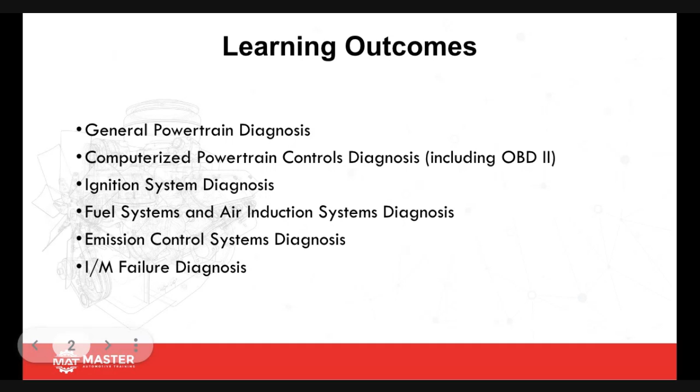But I do recommend that if you guys learn the 5-gas, purchase a used 5-gas analyzer. If you're like us here in California, we're required to actually have a 5-gas if you're a smog check station, and we use that more than just for emission inspection. We actually use it for diagnosing purposes also. That's what we're going to be covering with you in that section.

Anytime we're going to start a diag, I always recommend to start with an interview of the actual customer. Now, I get it, some of you guys might have a service advisor that is your liaison between the customer and you. However, your customer needs to be properly interviewed. Now, if you're here in the class, you're going to get access to this PDF worksheet that we've put together.

We've also had some input from a couple of great automotive instructors, Jim Morton for one, and we used some of his format, then incorporated some stuff of ours, and this is the worksheet that we came out with. So when a vehicle gets dropped off to us for a diagnosis or an evaluation, we make sure that this worksheet gets filled out. The more information we have pertaining to when the problem occurs, the easier it's going to be for us to properly diagnose it. So any diagnostic and or evaluation begins with a thorough customer interview.

The everyday driver needs to be the one interviewed before commencing any diagnostics. So if it's grandma's car, but grandson brings it, it's not a good idea to use grandson's explanation. If grandma gave him 10 minutes worth of information of how the problem occurs, grandson's just going to say it makes a noise. So we want to make sure that we interview grandma so she can give us every single detail of how we can duplicate that problem. And this way it's going to give us a better chance to properly diagnose it and repair it on the first try.

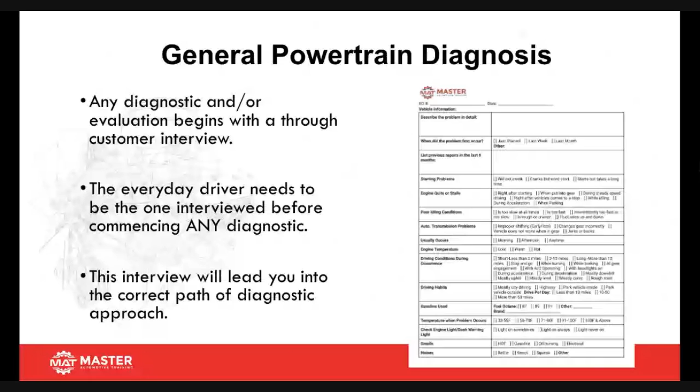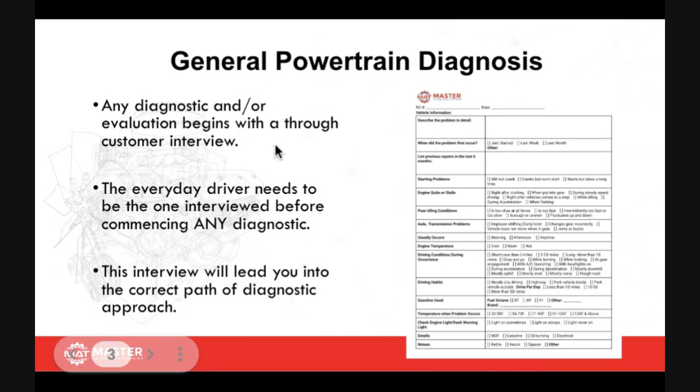One thing that we do is go on a road test, because if I go on a road test with the customer, it gives me a chance to see, listen, and duplicate the concern they're having with their car much easier than if I was doing it on my own. So keep that in mind if you guys are out in the shop. Make sure you do a proper interview, and then try to go out on a road test with your customer to make sure you're actually focusing on the right concern.

Another key thing is: is this a concern or a complaint? If it's a concern, that's something that interests you because it's important or affects you—that's the definition of concern. A check engine light on with a rough idle is a concern for a particular car. A complaint is an objection or something that is unfair, unacceptable, or otherwise not up to normal standard, like a customer complaining about noise from their new mud terrain tires. We need to be able to differentiate the two.

If I have a customer concern, it means it's an issue I'm going to have to pull tooling out for. If it's a complaint, usually it means you're going to have to look in the owner's manual or find some source of information to help them understand that it's something new with their car.

I don't know if you've had a customer that's been good for years—they finally decide to get rid of their clunker. The new car they pick up has different buttons and features the old one didn't. So they bring it in saying, 'my car is doing this and that.' When you go check it, it's like, 'oh, your car used to have a 6 CD changer, now you have Bluetooth, that's why you can't use that adapter on your car.' That would be a complaint, because you have to explain to the customer that as technology advances, that's why they're having a different issue they weren't used to having with their older clunker.

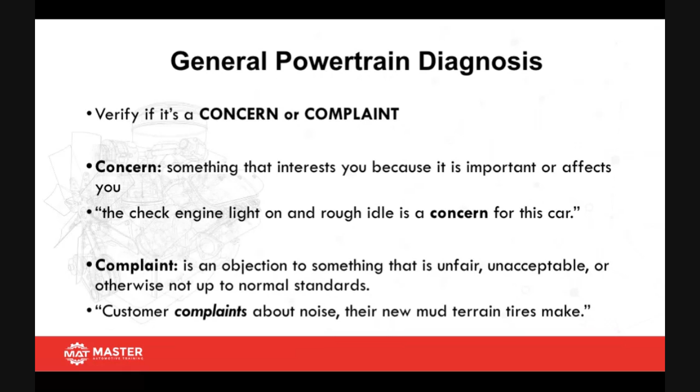Here's a good example of a concern: vehicle lacks power going up a steep hill, with a check engine light on showing codes 171 and 174. Both fuel trims are showing plus 35% on long-term and short-term fuel trim, meaning we have a lot of fuel adaptive on both banks. This is a concern since you have a MIL and a drivability issue that can be felt by the driver—this would be labeled as a concern.

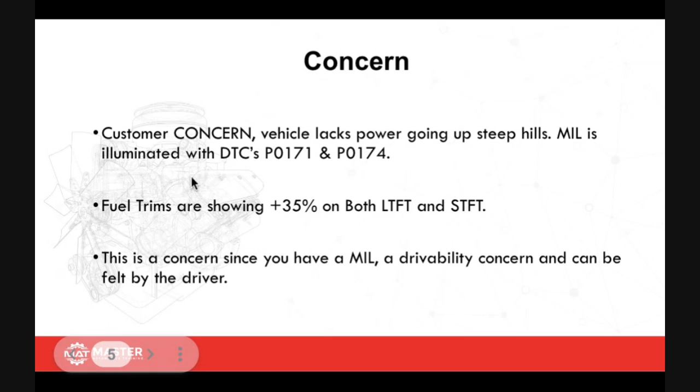So if a vehicle comes in and meets this criteria, you're going to call that a concern—that would be your customer's concern.

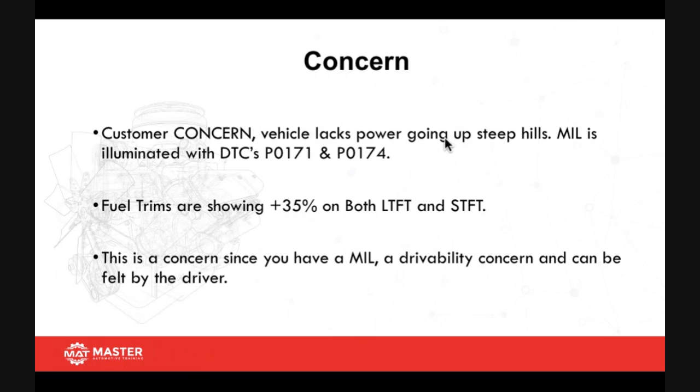Now a customer complaint—this is one I actually got to work on. A Ford F-250 came in, I think a 2007 or '08, and the customer's complaint was they weren't able to control the radio below a specific speed. The previous shop that worked on it tried to replace the radio, but the customer said that doesn't make any sense. So they brought it to us for a second opinion. This was relatively new and weird to me since I'd never run into this situation, so I did what every good technician would do: I pulled out the owner's manual, dug through the glove box, found it, and started reading.

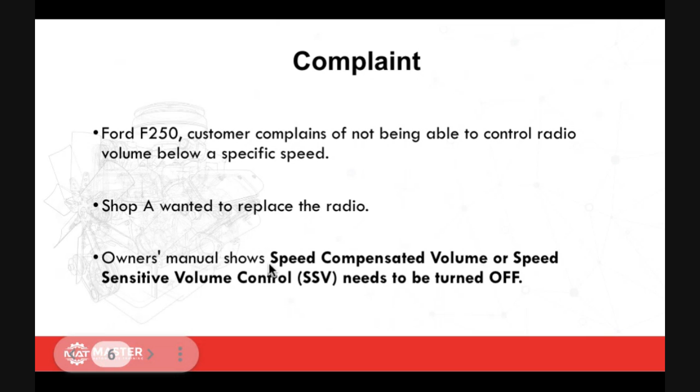What I found was this Ford product had a speed compensated volume—some call it speed sensitive volume control, or SSV—and it had been turned on. So I went through the menu functions on the radio and turned it off, and voila, the problem was gone. I documented all of that, and when the customer came in, I showed them exactly what happened and told them if it happens again, go through the menu section and turn it off.

Now most of you were probably thinking, why didn't you just sell them a radio? I could have, but if I'd sold them a radio and then someone accidentally did this again while the vehicle was still under warranty, when they came back to the shop, what would they expect? Another radio. And if you pull the radio out and try to get the manufacturer to warranty it, they're going to say there's nothing wrong with it.

And then what are you going to do then? Let them know that, so I messed up the first time and sold you this super expensive head unit, when in fact, all you really need to do was do a button sequence and turn it off. This is why it's important for us to be able to differentiate whether it's a complaint or a concern, and then how we're going to be able to approach it to be able to repair it.

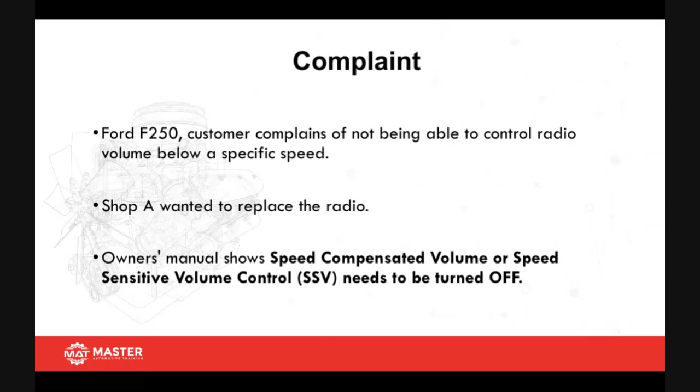Anytime we're going to start a diag, always make sure you guys start with the visual inspection. I can't stress enough how many times we've gotten cars into the shop where another shop was recommending a bunch of repairs, when actually all the car needed was just some visual repairs, some stuff that we saw visually, and it didn't need any in-depth or any crazy type of diag.

So when you're doing a visual inspection, make sure that you guys do stuff like check your belts. If the timing belt's accessible or has an access hole, kind of take a look at it. Serpentine belts, take a look at that. Radiator hoses, vacuum hoses, crankshaft pulley, alternator pulley. Sensors, make sure that they don't look like they're oil contaminated or broken, zip tied together, taped together. All covers are there, and if you possibly can, check the functionality of certain components. You can most of the time do that with a scan tool on the bidirectional side.

Now, something that's also very important as automotive technicians, when a vehicle comes into the shop, not only are you guys performing a diag, but you're also doing a visual inspection. This visual inspection helps you and the shop be able to recommend other services that might be needed by that vehicle. So that way the customer is aware of it, and then they can get that done at a later time or at that time that the vehicle is in.

Particularly when it comes to hoses, hoses actually deteriorate. And if you don't fix them or replace them prior to their deterioration, then that's when you can get a blown radiator hose that causes the vehicle to overheat and then turns out to be an entire engine overhaul. So make sure that you guys are also working with your shop foreman or your shop owner to create some sort of recommended intervals for these types of components. So this way you guys can recommend these to your customer when the vehicles are coming in for service.

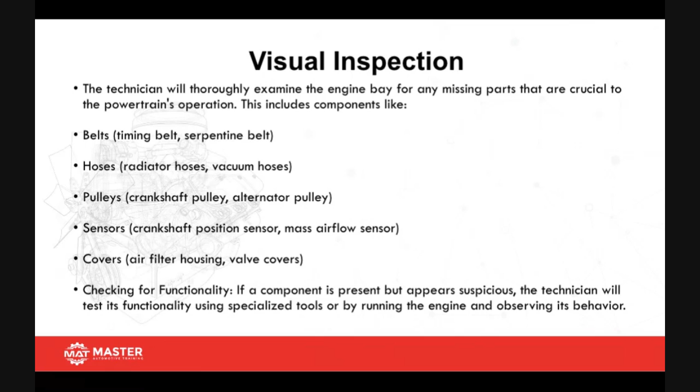Part of your visual inspection, make sure you're looking for modified components. Did they add anything aftermarket that wasn't there that came from the factory? Supercharger, turbocharger, did they add some sort of lighting kit? Anything of that sort, pay attention to it. Has this vehicle been welded or modified? Right? That's a big one. If the vehicle was in an accident and they re-welded, let's call it the front bulkhead, that can cause a ground delivery problem.

So that could lead to other faults. Are there any altered brackets or mounting points? Was anything moved, repositioned? Are there any non-standard materials used? Did they actually paint over a ground? Right? So we want to make sure that you guys can do any type of those visual inspections. So this way you can see right off the bat, do I spot anything here that might be suspicious that might be causing this issue?

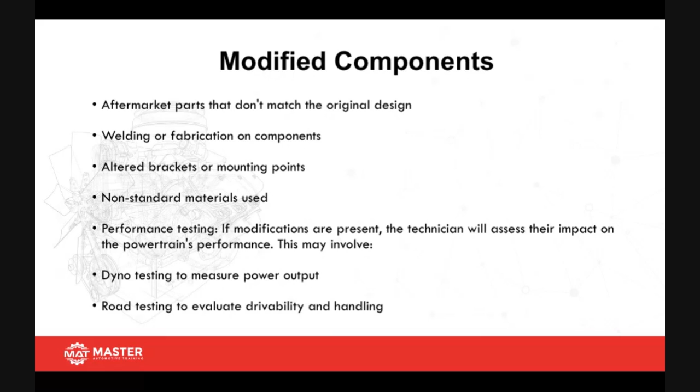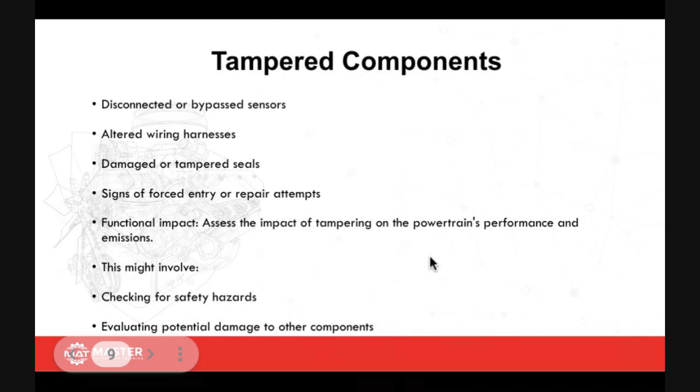Tampered components would be anything that's disconnected or bypassed, altered wiring harnesses, damaged or tampered seals, signs of any forced entry or attempted repairs, functional impact, like was the vehicle hit in any way, shape, or form? This one's important. Like when you come to some of the Euros, they keep the modules in a plastic box. And if the front windshield was replaced and not sealed properly, then you can get a lot of water filling up in that plastic box.

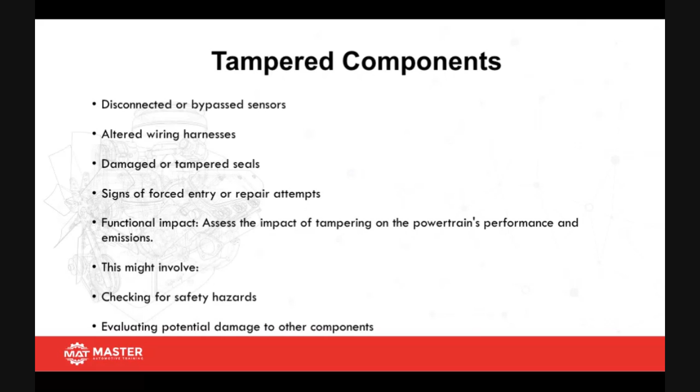So then what's sitting in that box? About 4 to 6 modules. And then once they get filled with water, what's going to happen is going to fry all of them. So this is why it's important that you guys do a visual inspection so you can determine if any of that's at play before you actually recommend any type of repair.

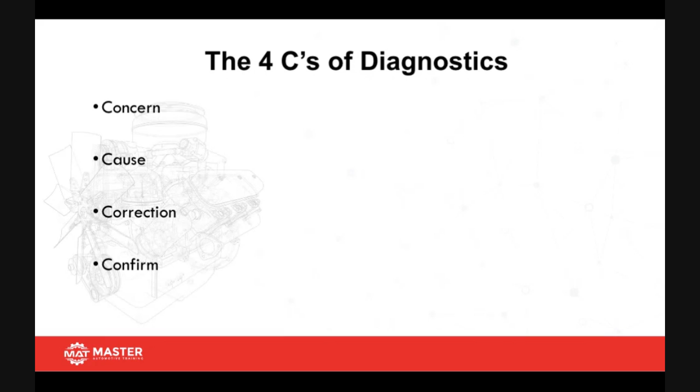When it comes time to diagnose a car, you always want to start with the 4 C's. What are your 4 C's? Concern, cause, correction, and the one that most technicians do not do, confirm. So let's go ahead and jump into them real quick so we can take a look see here.

So a concern. Vehicle comes in with the MIL light on. You pull the DTCs and you find a P0300 and a 302. You feel a rough idle and it started about a week ago. So now you have an idea of the concern that your customer is actually worried about. Now your job is to come up with a game plan on how you're going to approach this.

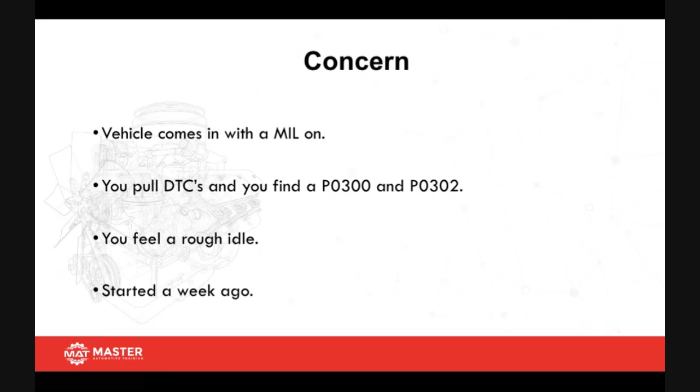Typically, one thing we do with any type of diag, after finding the concern, is run some sort of general test. Especially since this vehicle has a misfire, I would have started with a relative compression test, using an oscilloscope on the battery, either with an amp probe or connected directly to the battery, to verify all cylinders are contributing the right amount of compression. This way I can rule out a mechanical problem right off the bat and move into ignition or fuel. So we ran an RC test to rule out a mechanical fault, and that one passed.

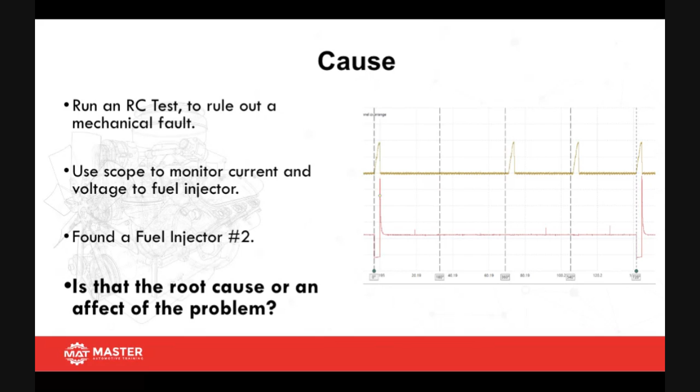Now, is that the root cause or an effect of the problem? The reason I ask is that on some newer vehicles, the engine computer will turn the injector off if it detects a misfire. In these cases, you want to save your freeze frame, then clear the codes and see if that injector waveform comes back. If it doesn't, you've confirmed it's a bad injector. Now your job is to figure out: is it a shorted or open injector, a power feed problem, or a control side problem? That's relatively easy to do.

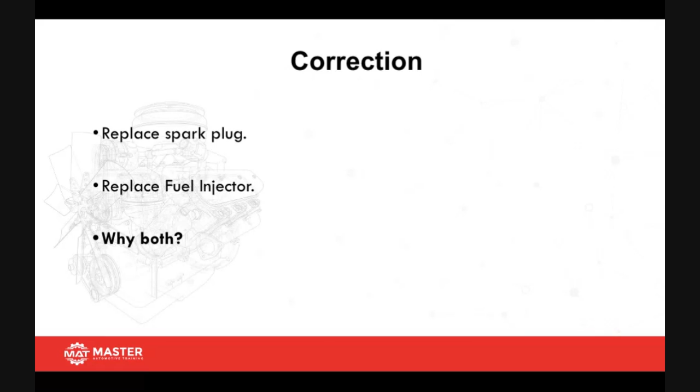From there, the correction would be to replace the spark plug and the fuel injector. Why both? Because if you had a problem with the fuel injector, that could have caused damage to the spark plug itself, if it was overheating or anything of that sort. It's best to replace those as a pair, so once the vehicle takes off, you're not running the risk of it coming back for something similar, with the customer saying you guys didn't fix it properly, the problem's back.

Then lastly, you want to confirm your repair. This is the step that most technicians skip. What they end up doing is the repair, and then their test drive is so minimal it's just pulling the car out of the bay and parking it in the stall.

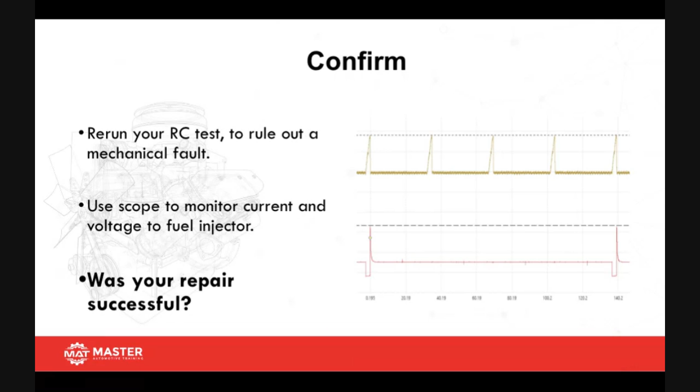So one of the things you guys want to get comfortable with before working on the car is service information. Anytime you're working on a particular car, make sure you get all your ducks in a row. Do your research, pull service information, pull wiring diagrams, and set up a plan before you start testing the car. Once we pull a car in, we're going to pull the codes, and once we have all the codes set, we start working on our plan. We don't want to waste time going back and forth or switching from one test to another without knowing if that's a good idea or a good process.

So service information is going to be super important. Like we said, we had a misfire, so we can look up misfire counters here, and this information will let you know how the system works.

So based off of the information here, the system's telling us, or the manufacturer's telling us, that the PCM uses a crankshaft sensor for misfire detection and to control spark and fuel. As the crankshaft rotates, the reluctor wheel teeth interrupt the magnetic field produced by a magnet within the sensor, producing a signal which the PCM reads.

That's positive information. Now, this is one thing that a lot of technicians suffer on because they don't go and read the service info. One thing that I'm a big believer in is if you know how it works, you're going to be able to fix it. So this is why we always want to turn to service information first, so we get a good understanding of how the system works.

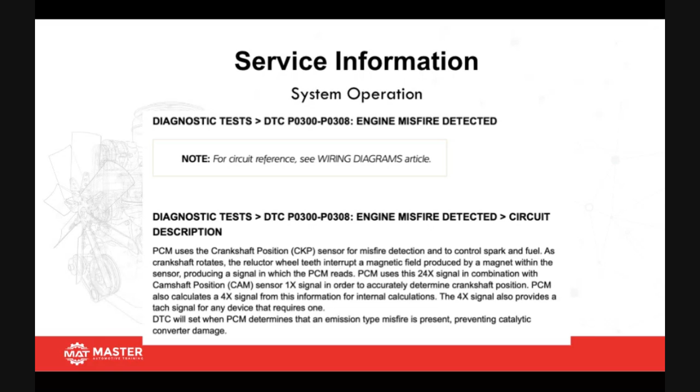So here's the whole diagnostic procedure for a misfire on a GM product. Now, one thing that I can tell you guys is at the beginning, you might be following each individual step. One of the things that happens with all these steps is a lot of times they're redundant, or the steps are going to say replace with a known good component. Unfortunately, we don't have that luxury.

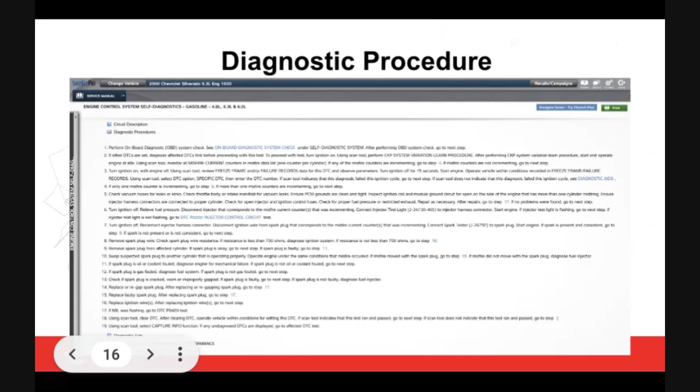Your best option is to read over the whole diagnostic procedure and then determine what are some tests you can run and what equipment would you use to run those tests. Run them and then verify with your diagnostic procedure which way you're going to be headed with the remaining part of that diag. Always make sure that you guys are looking at your diagnostic aids. Most service information is going to give you a little diag aid, as we call it.

So this one: if more than one cylinder showed a history code for misfire, look for something in common between the cylinders, such as a shared coil. Also check for vacuum leaks that affect this cylinder. If the fault cannot be duplicated, mist the secondary ignition system with water, and then operate the vehicle under conditions to set the DTC. So these diagnostic aids are very important.

They're telling you this because a lot of technicians around the country have run into similar issues, and this is what the manufacturers' tech help is recommending you do. So again, this is why we look at all this information before we start testing the car, to make sure that we have every angle covered when we begin to run our tests.

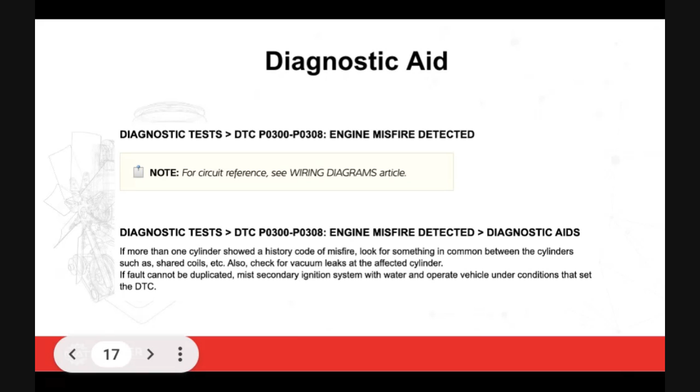The other one that I see most technicians not do is technical service bulletins, or TSBs. What ends up happening is technicians get so into a hurry and a frenzy to get it in and out that they don't bother to look at TSBs until the very end. A technical service bulletin lets you know of common issues that manufacturers have seen with particular cars and particular faults.

So for this one, information on rough idle, crank no start, extended crank, or misfire due to excessive carbon on the top of the valves or sticking valves. And then it gives you a list of all the misfire codes you might be attributing with this fault. Now, why would it be a good idea to do this?

What happens if this vehicle was in your service bay and it has a misfire and you've tested everything and everything tests out fine? Well, if you didn't bother to look at the TSBs, what are you probably going to end up selling them? Maybe spark plugs and coils, right? So this is why we want to make sure we look at the TSBs before, so we're 100% sure whether this TSB might be related to this particular fault on this car.

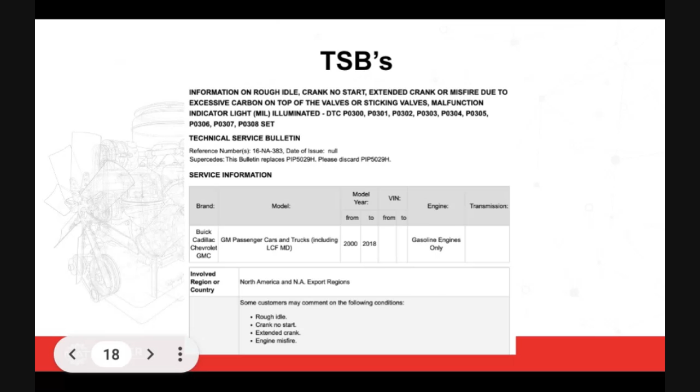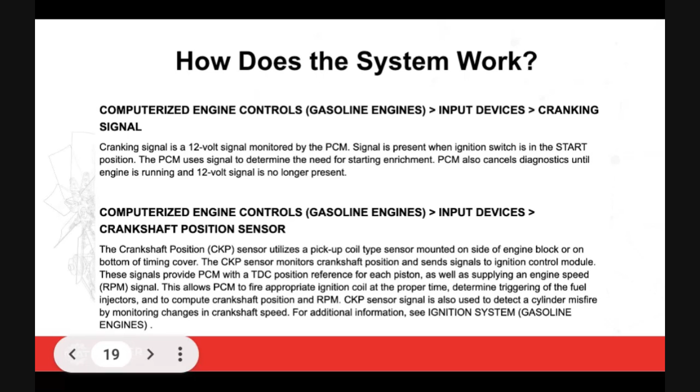The PCM also cancels diagnostics until the engine is running and the 12-volt signal is no longer present. So the PCM is going to be monitoring that signal to get the vehicle to start. That's super important. What if you get a car that comes in as a crank no start, but you weren't aware that the crank signal was what the PCM was looking at to know it needs to enrich it for startup? Okay, so this is why we always have to go to service information to know how this system works, so I can properly diagnose it.

And anytime you guys are going to be doing a diagnostic, either for a MIL light, a drivability concern, an emission failure, always remember these three funnels. It's an air fuel, mechanical, or an ignition problem. If it's air fuel, that's going to be fuel trim, volumetric efficiency, or calculated load. If it's mechanical, that could probably be valves, rings, maybe crank, maybe timing. If it's ignition, is it primary, secondary, or the coil? So my job as a technician is to quickly get into one of these three funnels.

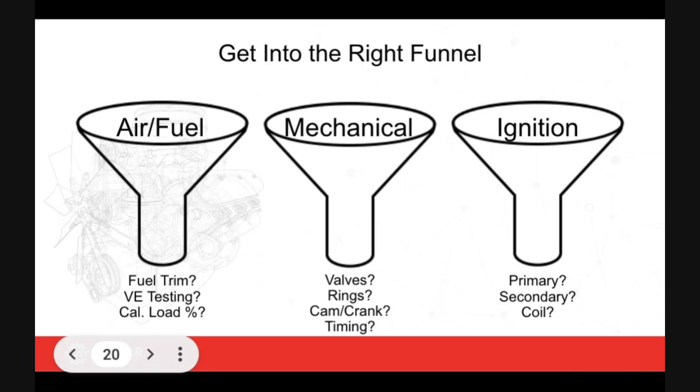Now, here's a good example. If a car comes in and has a drivability concern, lack of power, what happens if I add propane? Does the power come back? If the power does come back after I add propane, what could that be? That could be a fuel delivery problem. So now I'm going to fall into the air fuel funnel and I'm going to stay there. Now I'm going to start testing everything in relation to air fuel before I go into mechanical or ignition. This is the beautiful thing about understanding the funnels, right? We always want to do a general test first and then start going into the other tests to then determine exactly what is causing your customer's concern.

So this is what I was just talking about a few seconds ago: general testing versus pinpoint testing. Now, if a car comes in and you want to test for a misfire, relative compression test is a general test. This is going to let you know, do I need to go pinpoint compression or a leak down? If it's a breathing problem, do a volumetric efficiency test. Then your pinpoint test would be fuel pressure, fuel volume, exhaust restriction, or timing.

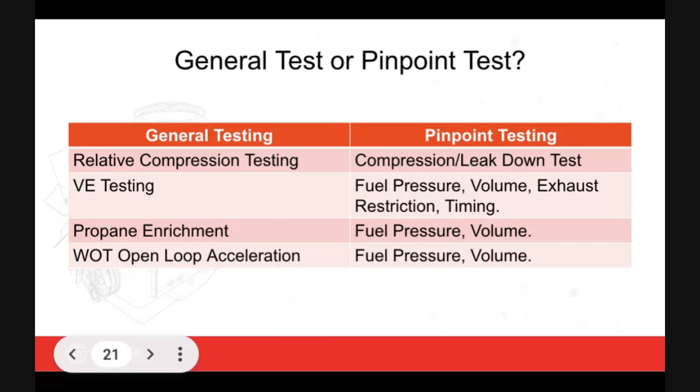Add propane. If that helps, then it's a fuel pressure or fuel volume problem. Wide open throttle, open loop acceleration. And if it goes into open loop and the problem goes away, then that means that it's a fuel pressure or fuel volume situation. So just for a quick reference, the 4 strokes of a 4-stroke engine are intake, compression, power, and exhaust.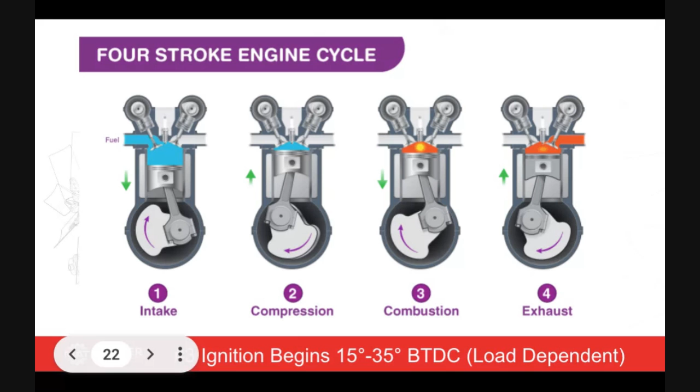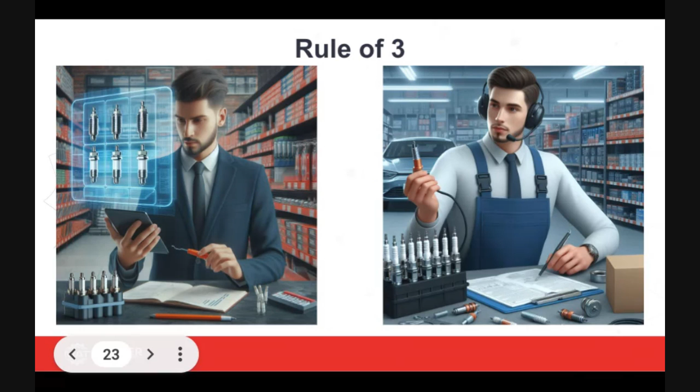So here in the shop, we have a thing called the rule of 3. And for some reason, it's always 3. A car will come in and say, hey, we already replaced three injectors on this particular cylinder and it doesn't go away. We replaced 3 coils. We replaced 3 modules. I don't know why it's always 3. So we came up with the rule of three. Please don't fall into this trap. This is for the guys that are not trained.

Here at the shop, we have a funny, we call it the rule of three. We have a rule of three that we make a big joke out of. But it's sad because it is a joke. However, this is the most common thing that shops and techs do out in the field. So typically, we'll get a car that comes in, and no matter what the problem might be, they've replaced three or more of that same component. We've had cars that come in, and there's a box of goodies, we call it. It's all the parts that have been thrown at it or replaced in the attempt of fixing the actual car.

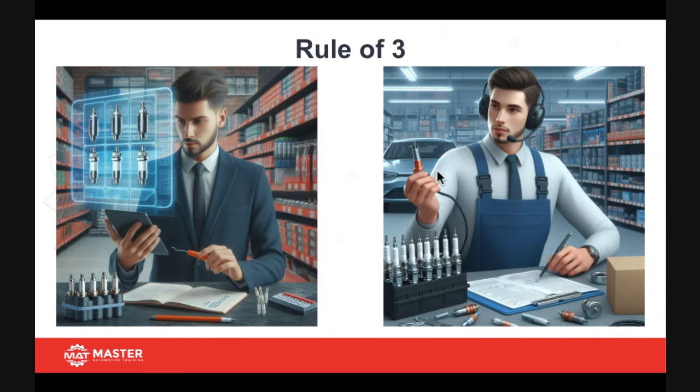We've seen cars with a box with three modules, three throttle position sensors, three throttle bodies, and stuff like that. And that's why we came up with what we call the rule of three. But with you guys being really good techs and attending training, you guys will not be part of the rule of three. So just if you guys hear it, it's a rolling joke that we have here in the shop, and that's what it means.

So one of the things that we can always do as a tech when the vehicle comes in would be to do a compression check. What the compression check is doing is testing the engine's ability to seal. And it's always a good idea to make sure that you do this with the engine hot. This way we can make sure that everything has expanded and seated properly. And then now we can run the test. What you're going to do is you're going to disable fuel. You're going to remove the spark plugs and disable spark. The reason why you want to disable fuel is you don't want to wash the cylinders. And then you want to disable spark because you don't want to burn out the ignition coils.

You want to introduce your compression tester into each individual cylinder, hold the throttle pedal wide open, and then crank the engine several times, usually about 5 to 10 revolutions, until you get a steady, no more bouncing or increasing compression needle. Make sure that your compression hose that goes into the cylinder has a Schrader valve in it. Do not remove it. You only remove that if you're using the testing hose for a pressure transducer.

Then you want to repeat on all cylinders and then document it. So we're going to provide you guys with a worksheet where you can actually write all this stuff down, because this is pertinent to your diagnostic and also your technician notes when you are providing those to the customer or your service advisor.

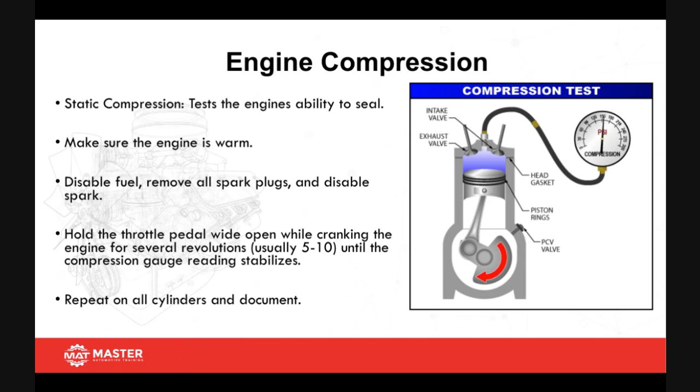After you do a compression check, the next step should be a running compression. A running compression test is going to test the engine's ability for volumetric efficiency. How well can that engine take in air? That's what we're measuring with a running compression test. Again, you want to make sure that the engine is warm.

You're only going to remove the spark plug for the cylinder that you're going to be testing, and you want to disable fuel for that particular cylinder. Also, make sure you ground out the coil or the spark plug wire for that cylinder as well. Start the car up, and then what you want to do is burp it right away. And then once the compression reading comes up, you should be at about 50% of that of static. So perfect example, if you have 160, you should be at 80 running, right?

So we always want to make sure that not only do we do the static test, but we need to follow that up with the running test. And this is where I see a lot of technicians drop the ball. They completely miss out on doing the running compression check. All they do is the static and then move on. We need to make sure that we also do the running compression check.

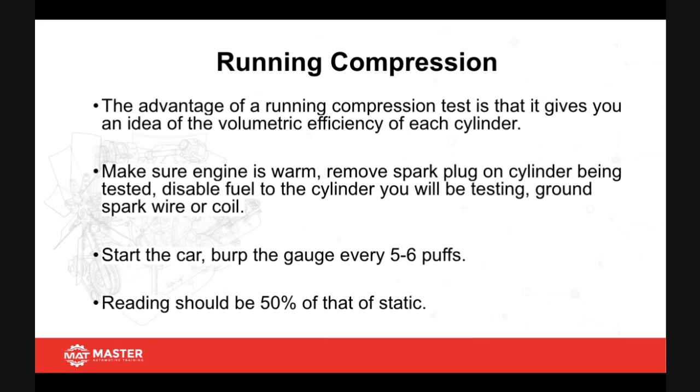So a wet compression check. What if we run down and we do the test and then we notice that one cylinder is less than the other? Well, one of the things we could do is we can add a couple of drops of oil inside the cylinder. What we're doing here is adding the small amount of oil, usually about a teaspoon or so.

If the compression comes back up within about 10 to 20 psi or percent, this is indicative of worn piston rings. So if you add the oil in there and then the compression comes back up, you're now 100% sure that this engine is going to need to be rebuilt. Okay.

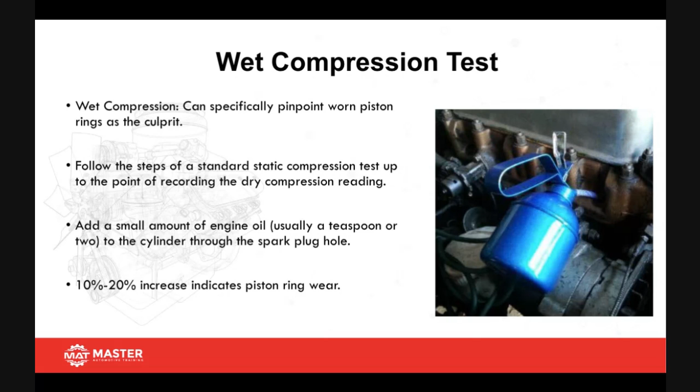After you run that test, right, you can also follow it up with a snap compression test. Here, what we're doing is we're testing the engine's ability to breathe under high load. And by doing so, we're going to start the car up, and then we're going to do a snap throttle, wide open throttle acceleration. Your compression reading should be at least 80% of that of static.

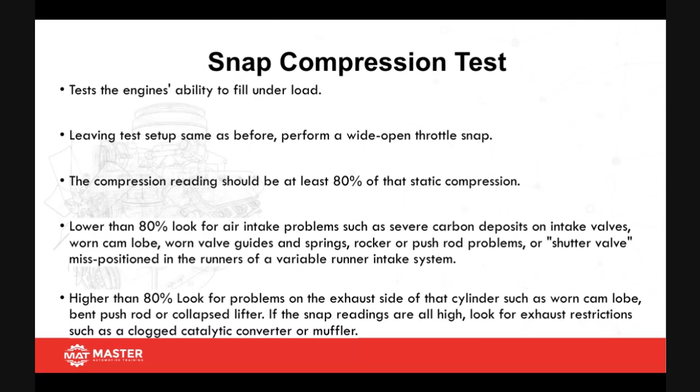And if it's lower than 80%, you want to look on the intake side for problems. And if it's higher than 80%, you want to look for problems on the exhaust side. Again, this is a test that most technicians do not run, and you should be, because this is how you're going to verify if the engine can breathe properly under high load.

Now, if all your compression checks come out bad, then your next step is to do a pinpoint test, right? So far you've done a compression check and that's confirmed for you that you have an engine mechanical problem. Now, what you want to do is pinpoint it. Where is it at, right? Where is the problem at? So that's when we start doing a pinpoint test of a cylinder leak down.

With a leak down test, you can tell if the loss of compression is due to things like worn piston rings, a burnt or stuck valve, or a leaking cylinder head gasket. What you want to do is go ahead and raise the cylinder to top dead center compression, remove the spark plug, put your leak down tester hose in there, and then put your tester adapter.

Once you connect the adapter to the cylinder, you should have up to about 20% loss. That's absolutely normal, even on a brand new engine. And the reason why is we have piston ring gaps. So we're always going to lose a small amount of compression through those end gaps, and there's not anything you can do about it. Now, if for some reason you have more than 20% loss, then at this point, you need to start pinpointing where it's at.

If you hear air coming from the throttle body, that usually means that you have an intake valve that's not sealing properly. If you have bubbles in the coolant, it could either be a blown head gasket or a cracked block. If you hear air in the exhaust, that would be an exhaust valve.

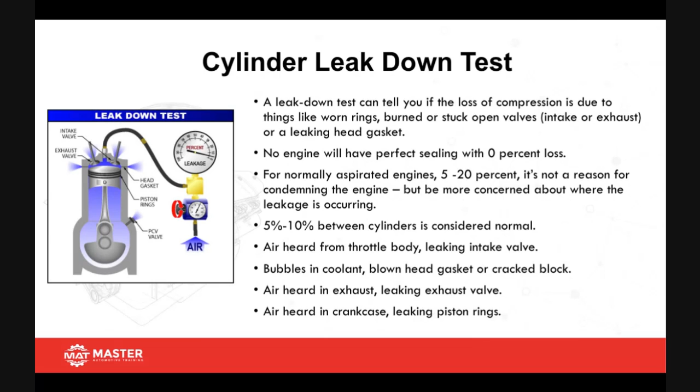We can also do a basic test like a vacuum test. A vacuum test is a great way to determine the engine's overall breathing capability, but does not provide results for each individual cylinder. So remember, if you're connecting a vacuum gauge, you're connecting to the intake manifold. The intake manifold is going to be a central junction for all cylinders. If I have 4 cylinders, all 4 of them are connected to that intake manifold. So each cylinder, as it creates vacuum, that's going to be distributed throughout the manifold.

So one of the best places to check for vacuum would be at the purge valve hose. The reason why is a purge valve hose is typically going to be in a centralized location. And the reason we do that is because what does a purge valve do? It sends hydrocarbons into the intake. So we want to make sure that those hydrocarbons are going to be evenly distributed between all cylinders. So that would be one of the best places to actually connect. Then once you connect your vacuum gauge, go ahead and start the engine up. A good engine at idle should be 18 to 22 inches or 17 to 21 inches, depending on who trained you and where they read that information from.

Also, for every 1,000 feet of elevation gain, you lose 1 inch of vacuum. So that's also important to take into consideration. For example, here we're at about 1,500 feet elevation, so we'll round up to 2. So we're going to lose 2 inches. So instead of 18 to 22, we're going to be 16 to 20. Okay. And that's important to know whenever you guys are doing a vacuum check.

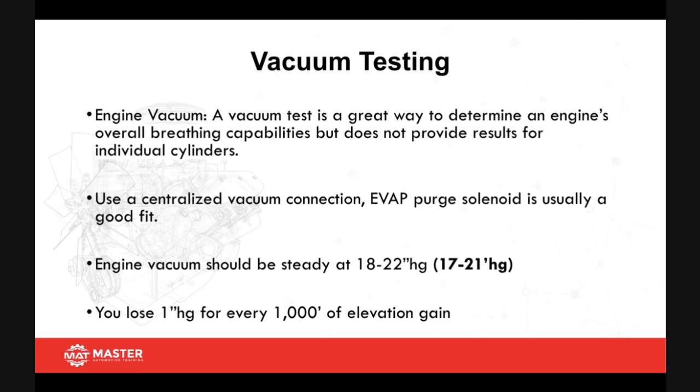If I'm looking at a vacuum gauge and I notice that my vacuum gauge is dropping about 1 inch of vacuum and it's happening consistently, but not back to back, it would seem as if it's happening on every other stroke or something like that. That's an indication to you that you have a valve seating problem, and it's usually only going to be about 1 inch. Okay, so we need to look at that.

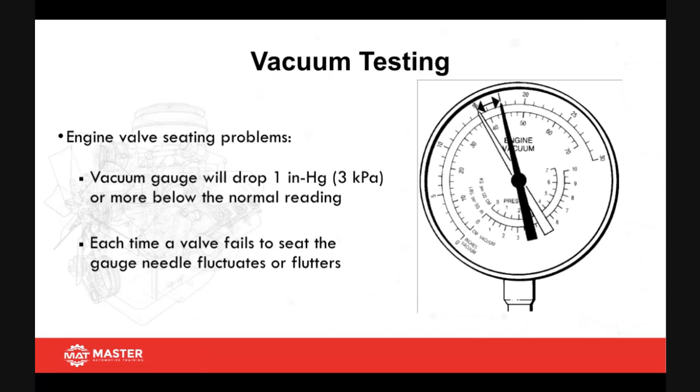And again, this is something that we actually diagnosed on, I think it was a 2019 Jeep that came in from another shop that misdiagnosed it. They called it spark plugs. And when the Jeep came in, all we did was connect the vacuum gauge, and what we were seeing is a drop of about 1 inch, happening maybe about every 1 to 2 seconds. Then we narrowed it down to a cylinder. We ran in-cylinder testing, and that's how we figured out that it was a bad valve. So the vacuum gauge was the one that led us to run these other multiple tests to verify if that was really the fault.

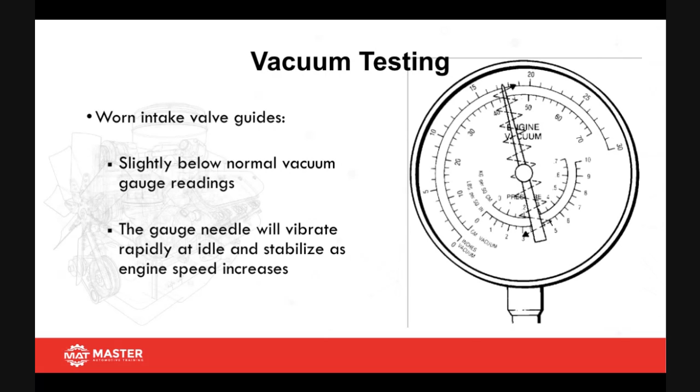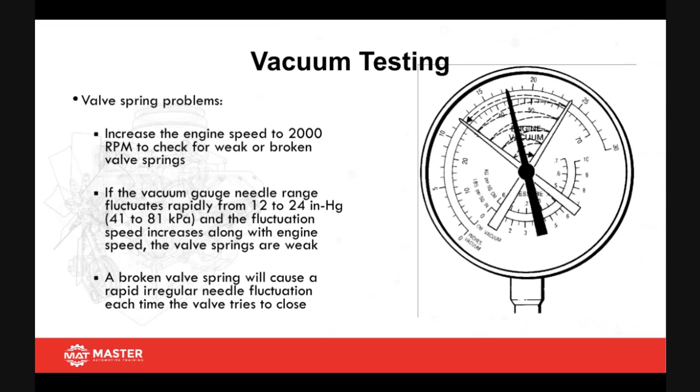Now, if you have a needle that's vibrating, so you're going to see it bouncing back and forth, that usually indicates that you have worn valve guides. At that point, you're going to condemn it and do a valve job. The other one would be if you have a broken valve spring. What you want to do is increase the engine RPM to about 2,000. At about 2,000 RPM, if you start seeing your needle jump between about 12 to 24 inches, just back and forth, that usually means you have weak valve springs. You can also see this on secondary ignition, so when we get to ignition analysis, we're also going to be talking about that.

How does your engine computer know that you have a misfire? Well, one of the ways it does that is by looking at the crankshaft position sensor. Would you guys agree that the crankshaft position sensor has a reluctor wheel with a fixed amount of teeth, and these teeth are a predetermined size? So you should have said yes. Now, because of that, would you agree that there's no way that any one of those teeth could get larger or smaller? And they can't, because they're already a predetermined size.

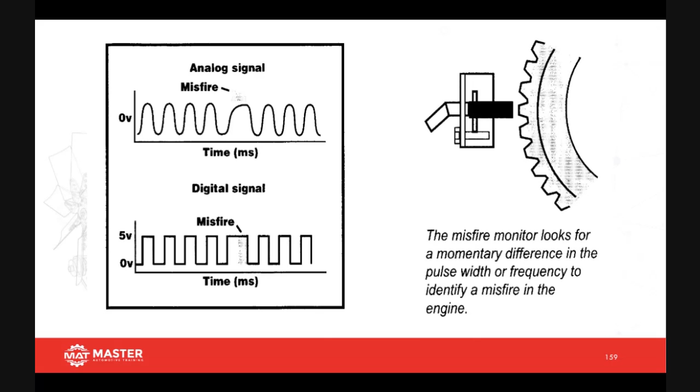Now, if for some reason the PCM detects a longer tooth, that's how the PCM knows that there was a crankshaft slowdown. And if the crankshaft slowed down, what is that indicative of to the PCM? There was a misfire. Something caused that cylinder not to fire properly, and that's why it elongated. So that's how the PCM is able to know that there was actually a misfire.

One of the things we always want to do when a vehicle comes in is start off with a digital compression check, known as a relative compression test. The reason we do this simple test is it helps us quickly identify if we have a mechanical problem. There's nothing worse than starting a diagnostic thinking it's spark plugs, putting on plugs and coils, starting the car, and it's still misfiring. Then you do an actual compression check and find out the car has low compression. If you had done a relative compression test from the get-go, you would have known that, and instead of ordering plugs and coils, you would have gone straight to a mechanical compression check. That's why it's a good idea to start with an RC test, or digital engine compression check.

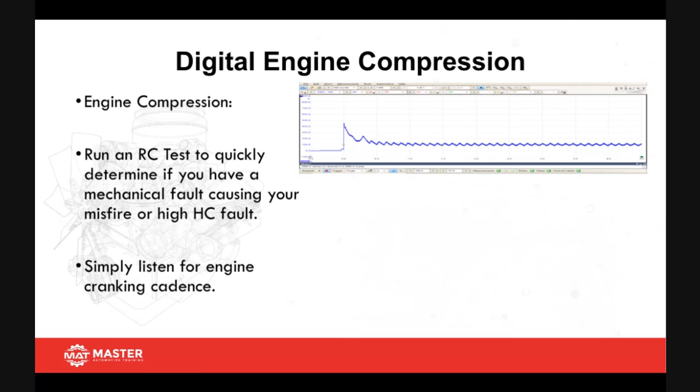So when we're cranking, the starter is going to pop out and begin to rotate the flywheel. Each one of these humps you see is the starter using more amperage to overcome compression. If we see a low or missing hump that keeps repeating, that's how we know we're low on compression.

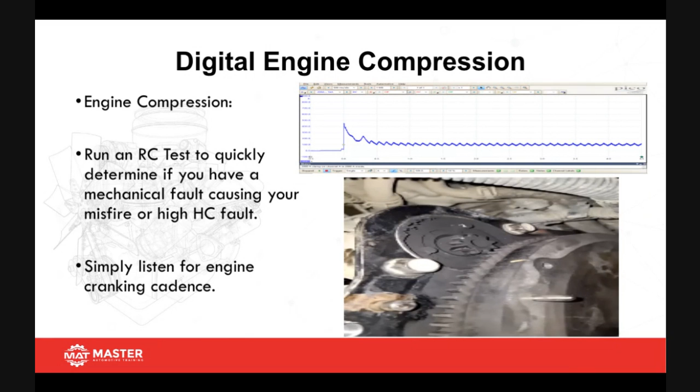So if you ran this RC test and this is the waveform you got, what are you going to do next?

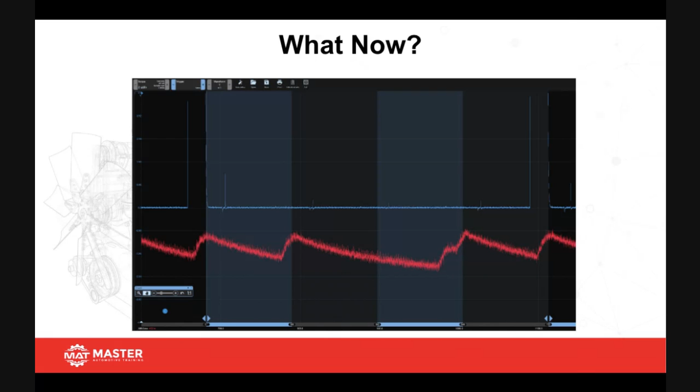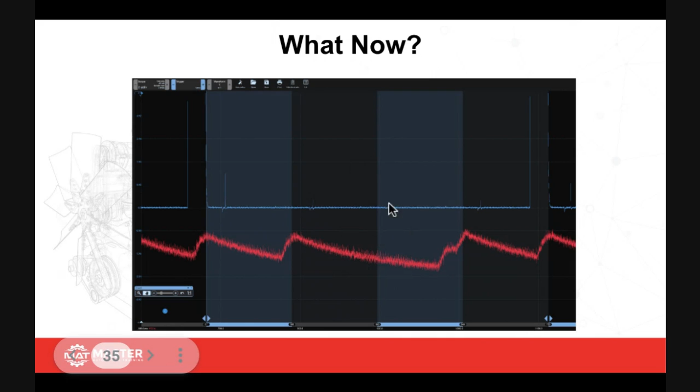Definitely going with a compression check is going to be your best bet. Why do we say that? Notice here we're using the sync up here for ignition, and this is cylinders 1, 2, 3, and 4. So we have 1, 3, 4, and 2. If you guys agree that cylinder 4 has no compression, at this point I'm going to do not a relative compression, but an actual compression check on that cylinder. There was no current draw here, so the starter didn't even need to work to overcome any compression. So we have a loss of mechanical compression there that we need to check out.

Now, what if for some reason you think it might be a fuel injector causing your misfire? Here's the easiest test you can do: walk around to the back of the exhaust and smell it. If you have fuel being injected into the engine, you'll get the rotten egg smell, the sulfur smell, and if you have that smell, you automatically know you have fuel. Now if you have an engine that's misfiring and you go to the back of the tailpipe and you don't get that sulfur smell, you don't have fuel, so your misfire is going to be fuel related. This is a good and easy test for you guys to determine if this is a fuel delivery misfire.

Now there's another thing you can also do, and that's use a 5-gas analyzer. I understand some of you don't have access to one, or you're not in an emission state. But if you are, and you have a 5-gas analyzer, put the probe in the tailpipe and look at your hydrocarbons. If you have a misfire, your hydrocarbons should be relatively high, over 100 ppm. If it's not, then that means your misfire, again, is fuel related—there's no fuel being injected into that engine. Pretty easy way to check.

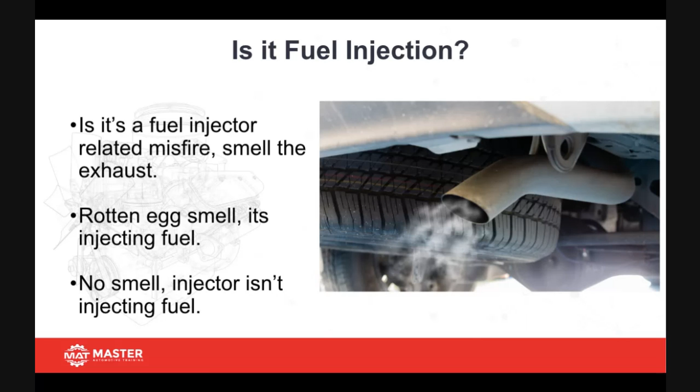Another thing we can do is a quick check on the ignition system. Here we pulled the fuse out for the ignition coils, because typically the ignition coil fuse feeds all coils. We put a jumpered fuse, then put our amp probe around that wire. As you can tell, we have one injector, two injector, no injector, and another injector, and then it repeats itself, so these four would be the four cylinders on that engine. Because this third one here had no current ramp, that means that injector—well, that ignition coil—didn't saturate and doesn't work. This ignition coil is shorted. How do we know that? Because it's a vertical rise and then it just cuts off and drops off. It didn't create a ramp like we see on the others. So here we could say this ignition coil is shorted and needs to be replaced.

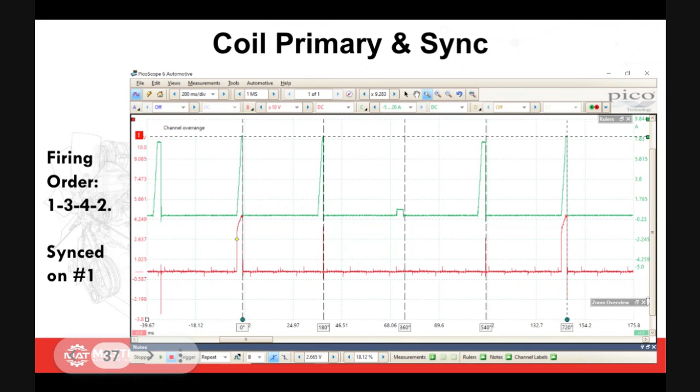Also, we can definitely use our paddle probe and then check for secondary ignition. Now, secondary ignition, we're going to learn more about this in the ignition class, but always make sure you guys measure your burn time, which is from here to here. That should be 1.0 to 1.5 milliseconds.

And then your KV, which is this one here, needs to increase with pressure. And if you notice this line is nice and smooth, like picture perfect, that normally means that spark didn't enter the combustion chamber because it wasn't affected by any type of change.

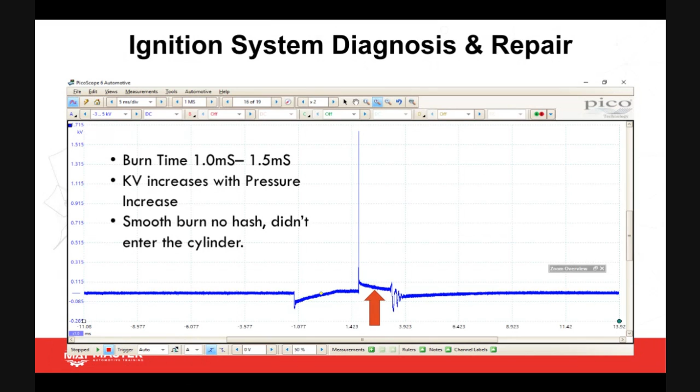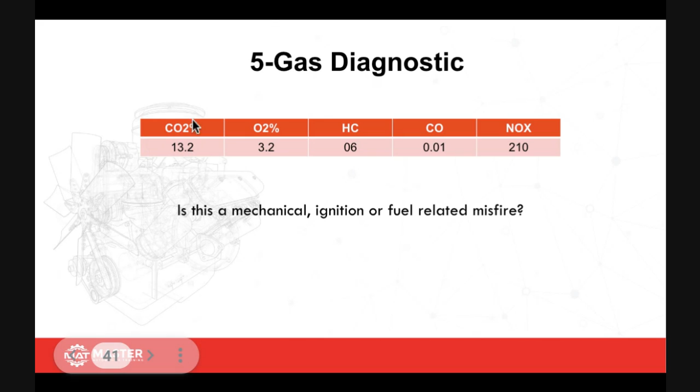Here we got another one, which is 13.2, 3.2, 06, 0.01, and 210. What do you guys think is wrong with this one? Now, if you said fuel misfire, you're 100% correct. And we can say that because our CO2 is within acceptable limits, our O2 is high, and our HCs aren't too bad.

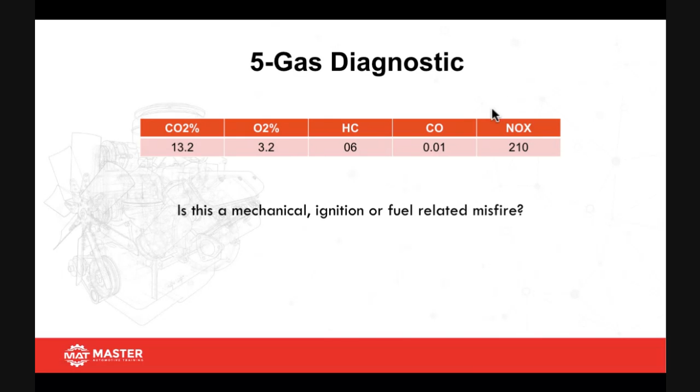So if you guys said this is a fuel-related misfire, you're 100% correct. How do we know there's a fuel-related misfire? CO2 is low, but still within acceptable limits. We have a lot of oxygen left over. Hydrocarbons is actually low, and then NOx is high. So this means that we were able to compress a lot of air, but we didn't consume it. So this would be a fuel-related misfire.

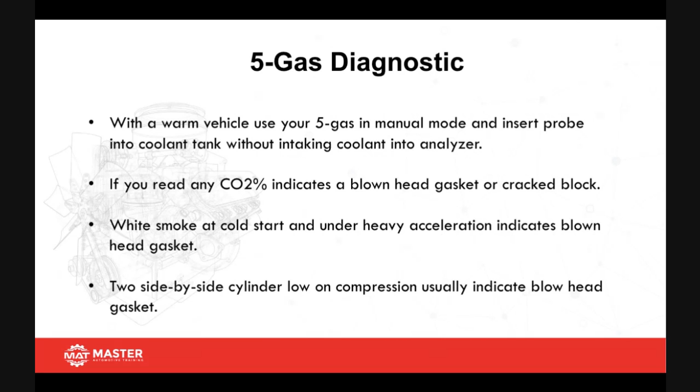We can also use a 5-gas analyzer in manual mode to check for a blown head gasket. If we remove the radiator coolant cap and notice that we're reading CO2, the only way we can get CO2 in the coolant is if we have a blown head gasket, because CO2 is a byproduct of internal combustion. And if we also have white smoke at cold start and under heavy acceleration, this also indicates a blown head gasket. And if for some reason you have low compression on two companion cylinders side by side, that usually indicates a blown head gasket between the two.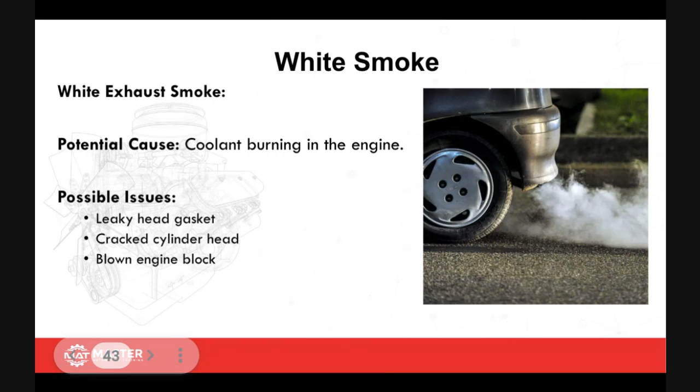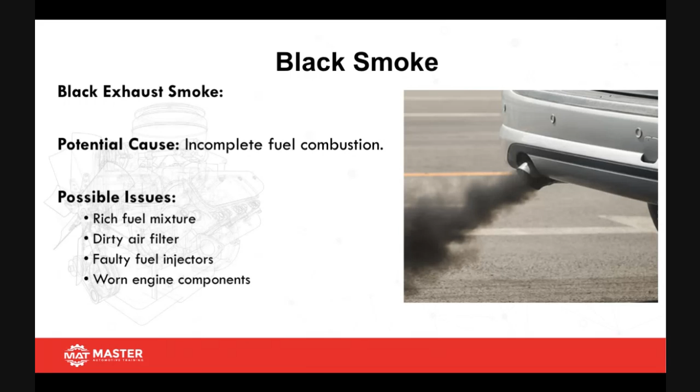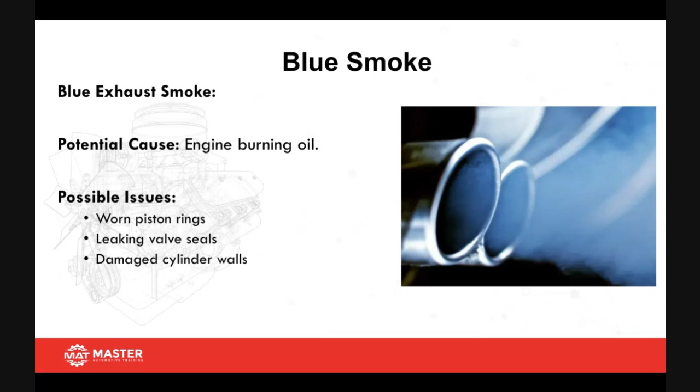Now, if you're seeing white smoke, that typically means you're burning coolant. You would need to do a block test or a CO2 test to verify if it is what you think it might be. And if you see black smoke, that typically indicates incomplete fuel combustion, meaning you're consuming too much fuel but not actually burning it all, and that's why you're getting that black smoke out the tailpipe. And if you have blue smoke coming out the tailpipe, that usually means you're consuming oil. Your engine is burning up oil and it's being consumed, and that's why you're getting that blue smoke out the tailpipe.